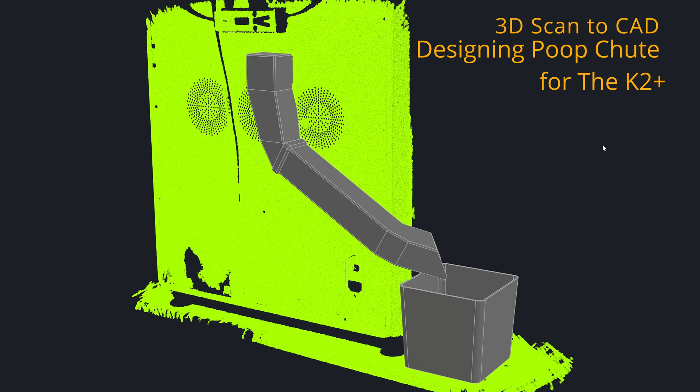Hi everyone, so I got myself a new printer, a Creality K2 Plus, a $1900 3D printer, and it weighs about 50 kilograms. This printer will replace the K1 Max that I've been using for over a year.

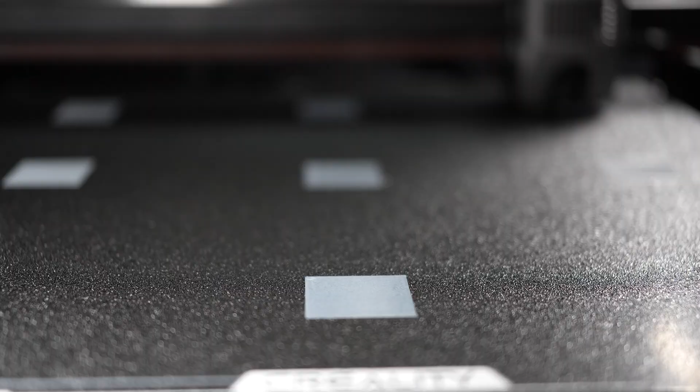Okay, look at the quality of the first layer, it's very good.

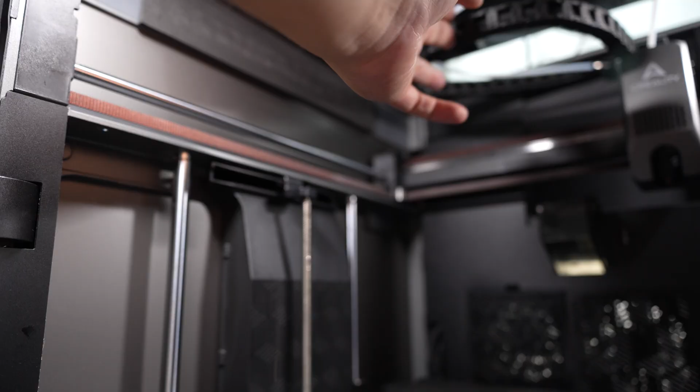So the only mod that I have made so far is adding a foam pad on the side of the printer, because the belt here is clashing and making a loud noise.

So if you look at the back side of the K2 Plus, there's a waste chute exit port here, but it doesn't come with a collector like a plastic bin. It will shoot out this little poop in the back of the machine against the wall.

So in this video, I'm going to make a chute rail from this point down to this point on the tabletop. There are two mounting screws here, but I'm not going to use them because they're self-tapping screws.

The female thread is plastic, so I don't want to take it off and put it back on. If you do this several times, it's going to strip the threads.

So I will use double-sided adhesive tape for mounting this.

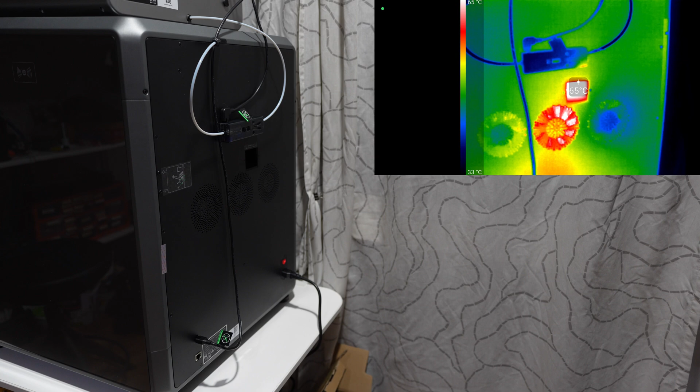So the temperature near the heating fan is about 53 degrees Celsius, and near the waste chute about 65, because now I'm printing with ABS. Now it's above 65 degrees.

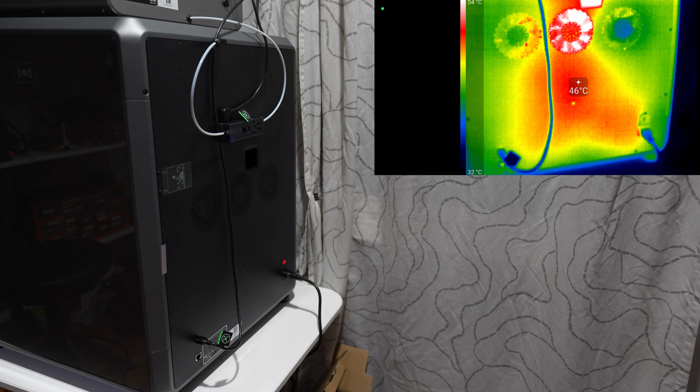So I recommend that you should use ABS or PETG. And this should be enough.

So the scanner that I'm going to use today is the Creality Raptor X for scanning. Creality K2 Plus, a flagship printer, is going to be scanned by a flagship scanner. And I'll use my gaming laptop here.

I choose 0.3 for the resolution.

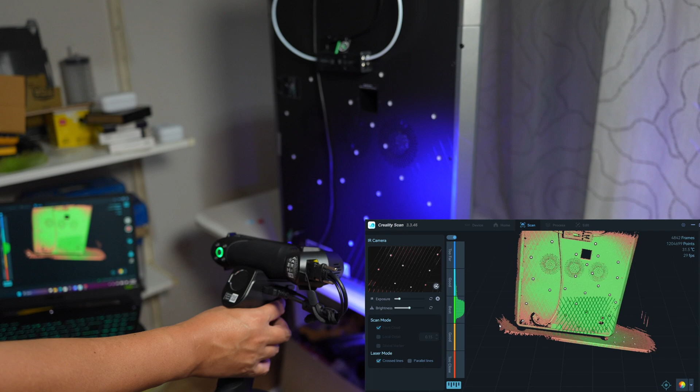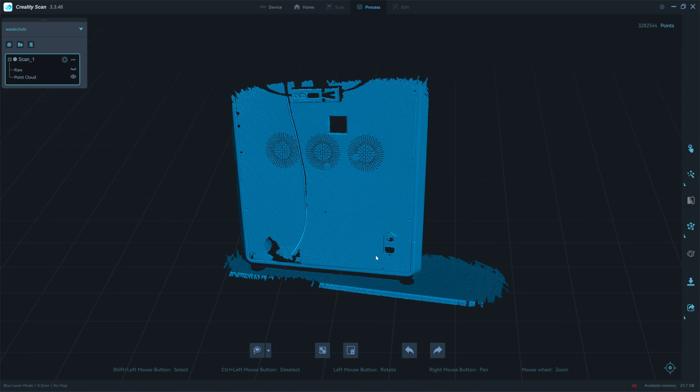Let's fuse the point cloud, 0.3mm. Remove the marker, click here. Okay, here's the scanning result from the Raptor X. Next, I'm going to export this as a point cloud.

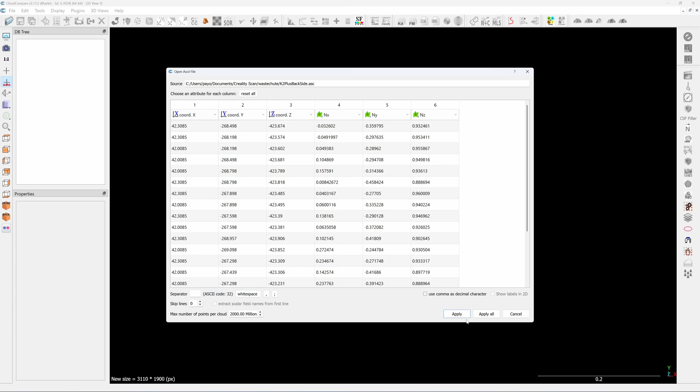Okay, this is CloudCompare. I'm going to bring in the point cloud for alignment. I will align this panel to the XY plane. I click on 3 points, 1, 2, and 3, because it's a flat plane.

Next, I'm going to align it to the X or Y axis. I'll rotate it using the edge of my monitor to align it. So now it's aligned to the X axis.

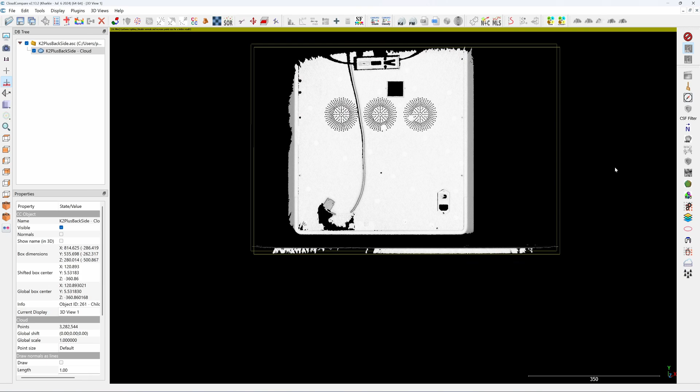Next, I'm going to move the corner to the origin point. Now it's already at the origin point. Next, I'm going to change the color. This is very important because in Autodesk Inventor, you can't change the color later.

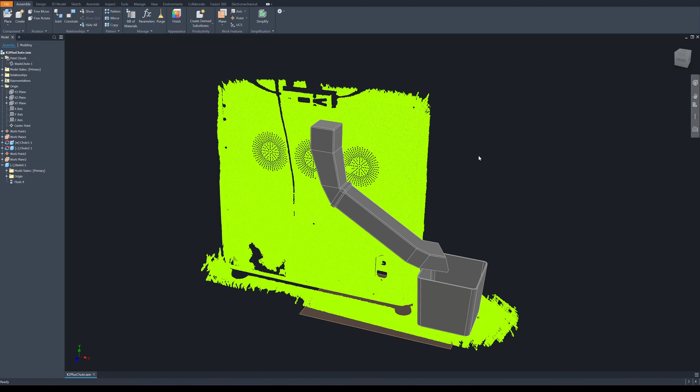Alright, now it's ready for reversing with Autodesk Inventor. Okay, here's Autodesk Inventor. This is the waste chute that I designed using the point cloud as a reference.

So my concept is that the tube has to be larger than the exit from the printer. The exit from the printer is 4 by 4 centimeters. So if I measure from this side to this side, it's about 42 millimeters.

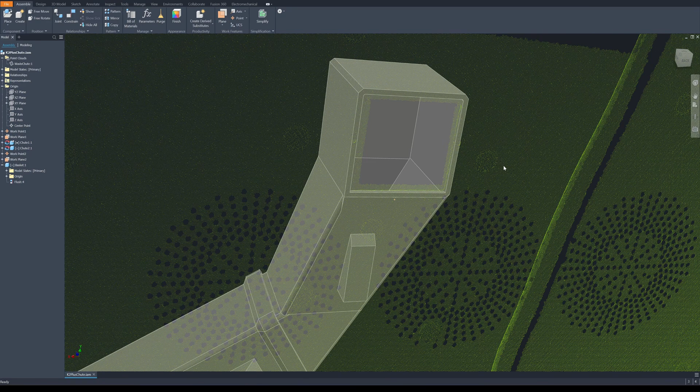The one that I made is larger, so the poop that comes out from the printer should be less than 4 centimeters. That's why the manufacturer designed the exit to be 4 centimeters.

And for the second part, I won't be using the panel screw because it is a self-tapping screw, so it's not meant to be used for mounting the waste chute.

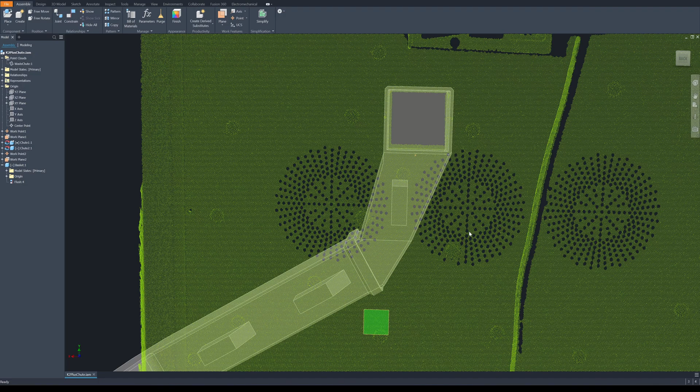The waste chute is between the two fans. On the left is the exhaust fan, and in the middle is the inlet fan for the heater. So I'll try not to block these two fans.

So I spaced the tip from the panel for 15 millimeters. I found that for a mechanical fan this size, if you have space about 15 millimeters, it won't block or give resistance to the airflow.

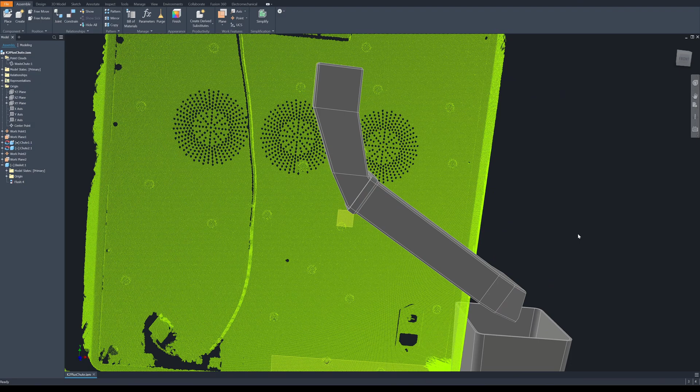This will be the mounting point, 3 points in total. So I divide the tube into 2 parts, because it's too long to print in just one single print.

The smaller one, the first one, has only 1 mounting point. So these two tubes overlap, one is bigger than the other, just a little bit, overlap about 8 millimeters. And this tube will go around the corner of the printer.

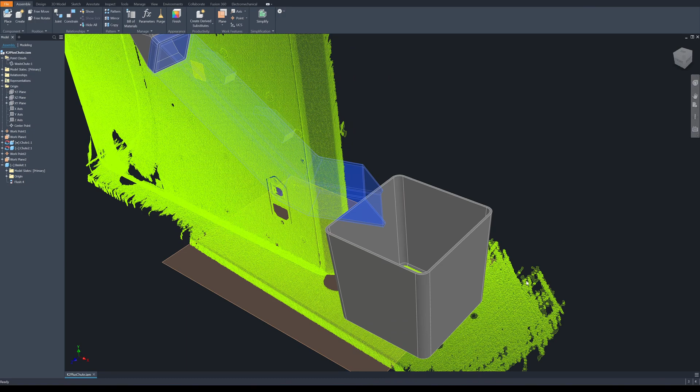Waste should be falling into this cup basket. The angle here is 60 degrees. If I put it to 45, the basket would be much shorter. So I think 60 would be enough for making the waste fall into the basket.

Okay, here's my workflow for designing this part. First step, I will create a sketch. I intend that the wall thickness of the tube will be 2.4 millimeters.

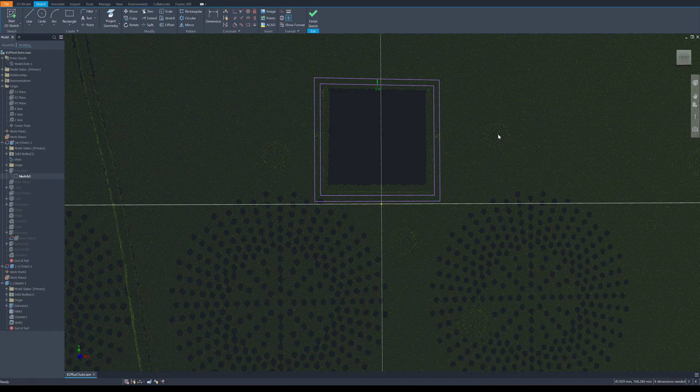Printing with ABS, I think 2.4 would be quite enough, not too thin, not too thick, a little bit larger than the exit hole from the printer. And I create this sketch by snapping it onto the plane, using the point cloud as a reference, the back panel plane. Here's the plane.

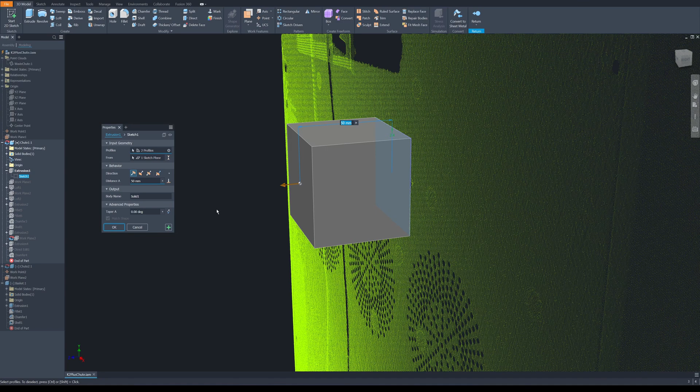And then I extrude it like a box for 5 centimeters, because I noticed that when the printer ejects the waste, it will fly out in the horizontal direction. So I need some space so that the waste won't knock on the wall and bounce back inside the printer. So 5 centimeters would be enough, I think.

Okay, next step, I create a plane here, horizontal to the table.

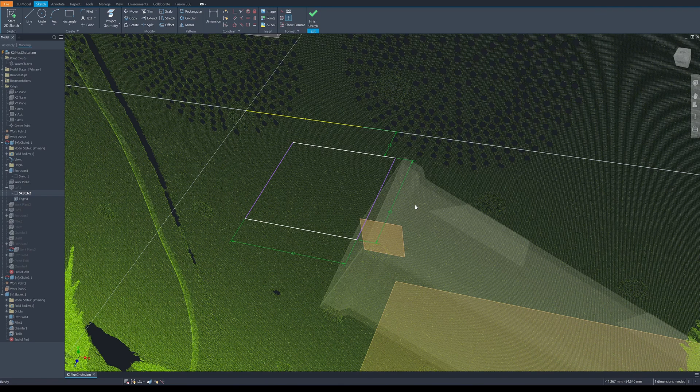This plane is perpendicular to the panel as well. The size of the square box here is 43 by 43, so I choose the minimum size for the tube at 4 centimeters. The largest poop will be able to pass through this channel, and I arrange it manually so it will be positioned a little bit to the right and 15 millimeters from the panel. Next I choose the loft command to loft these two faces together.

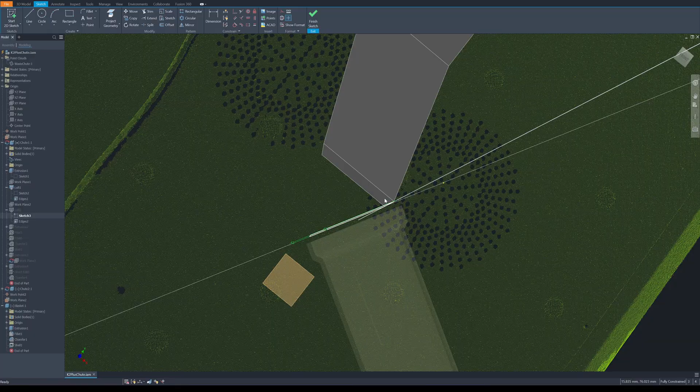Then I create a second sketch, making an angle to the first sketch of 60 degrees, so I can always come back and adjust this angle. First time I chose 45, but if I choose 45 the tube will be too low and closer to the table. So I think 60 would be enough, and the waste should fall into the box easily.

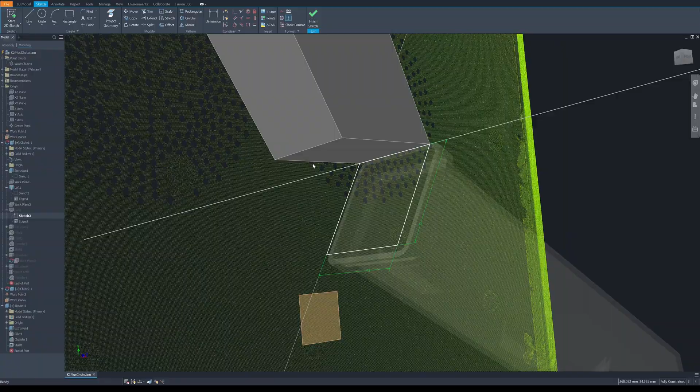I create a sketch with the same size as the box, and then I loft it for the second time, so it looks like a pyramid shape. Next I create a sketch here and extrude it for 10 millimeters, so we have this shape now.

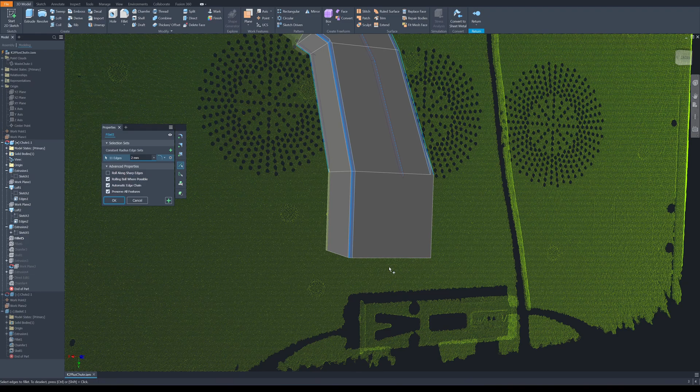Next step, I'm going to create a fillet on the 4 corners because we are going to print in this direction. This side will be facing the print bed, and this side will go up, so the wall line will run along this, and you should create a fillet so the print head will move smoothly without a sharp corner. Fillet is quite good when used parallel to the wall, as it can improve printing speed.

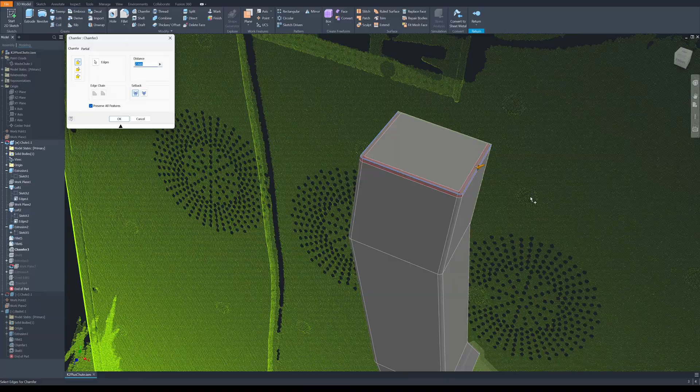Next I make a chamfer here for 2 millimeters, so it won't be too sharp. Next command, I use the shell command to make it hollow, and I remove this face and this face, so two faces removed. Now we have a hollow tube shaped like this, the one I just made.

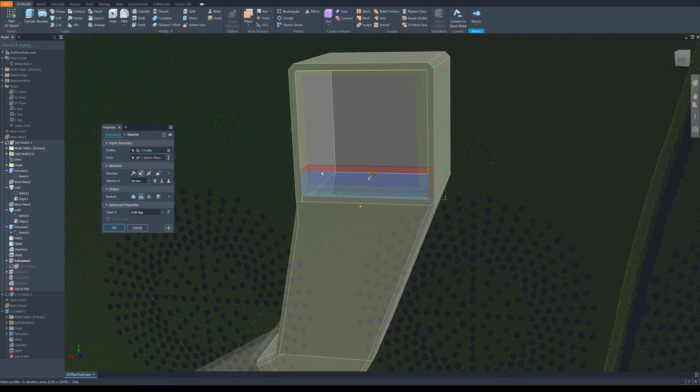And I made one cut here, because due to the thickness function the wall is aligned in one angle, so I need to cut it open. It's lower here, see, this one will be lower than the exit from the printer, so there's nothing blocking the waste from going back inside the printer.

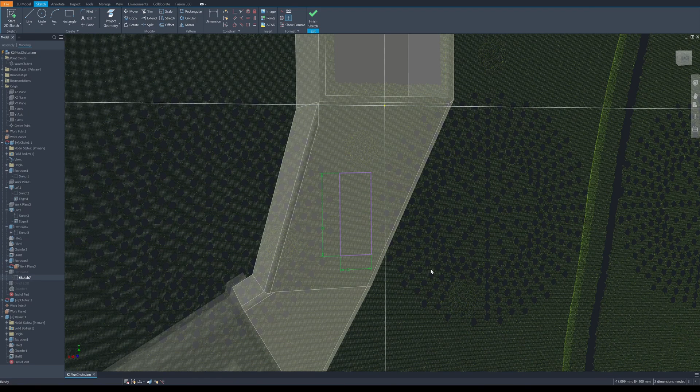Next I'm going to create a mounting point here for the first tube. The mounting point will be between these two fans, and the size is 12. 12 is the width of 3M VHB tape, and the length is 3 centimeters.

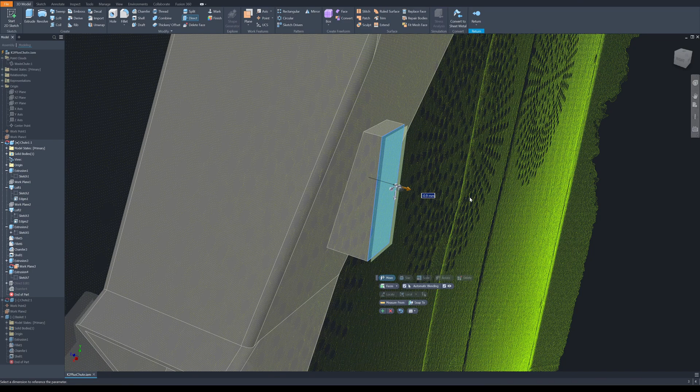Then I extrude it to this face of the part, creating a wedge shape, and then I offset for the thickness. I use the direct move function to move the face back about 1 millimeter to compensate for the thickness of the double-sided tape. So you need to use double-sided tape that is thicker than 1 millimeter, about 1.2. If it's thinner than this, this face will crash with the panel before the adhesive tape, so keep that in mind.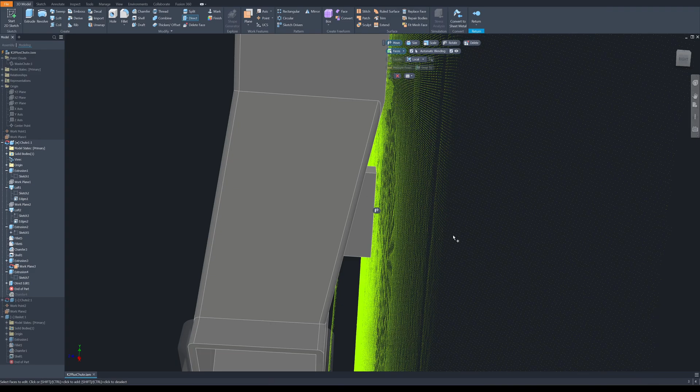3M VHB, the white color tape, that one can fit into this. I'm not sure about the red one. Okay, so we finished the first part. I'm going to the second part.

To create the second part, I project the profiles from the first part, and this yellow outer line is from the first part. Then I extrude it for 190 millimeters, so it's just passing the body of the printer, if you look from the top, see here.

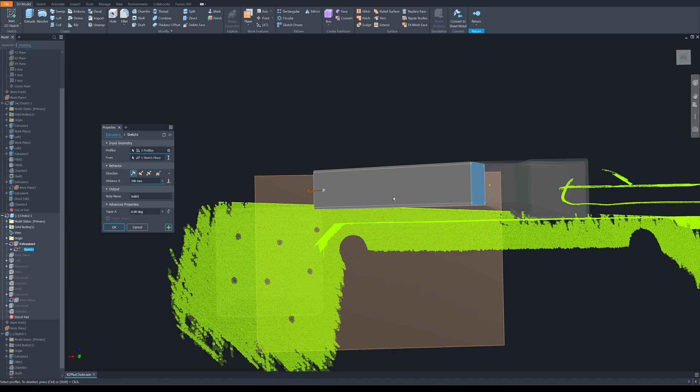And then I do the same, I make a turning angle. I think it's 45 or 60 degrees, I can't remember, let me check. Yeah, it's 45 degrees. I create a plane 45 degrees from this plane, then create this sketch which has the same profiles, and loft it to make a turning angle.

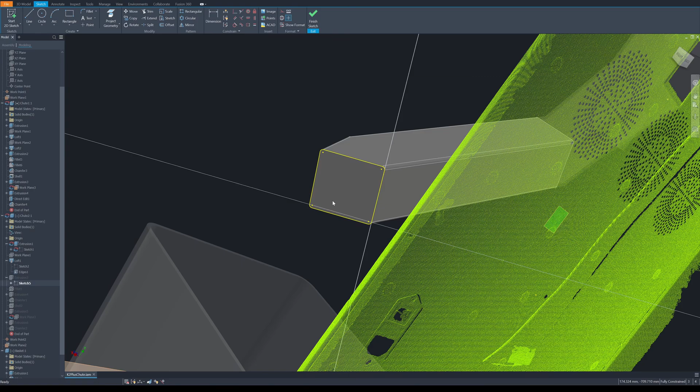Then I create this sketch, just projected from the last profiles, and extrude it for 8 centimeters, so it's now reaching the basket. I draw the basket, the last object. I draw the tube first and then the basket later, so I can find the height of the basket.

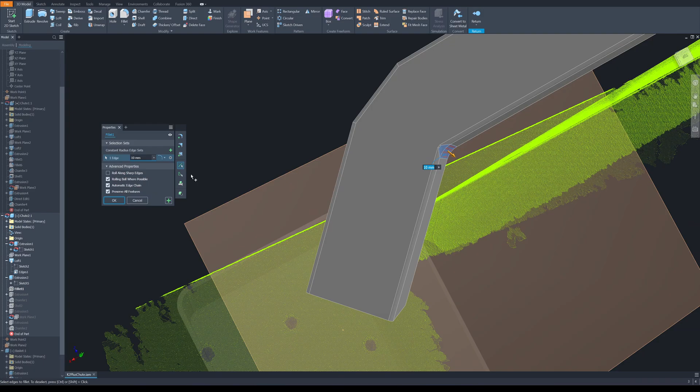Next I create a fillet here to make the turning smoother, so when waste falls and hits a curve or something, it's not a sharp corner. Next I create a new sketch on the starting point, larger than the original one by 3 millimeters, and extrude it for 8 millimeters, so we have a two-step body.

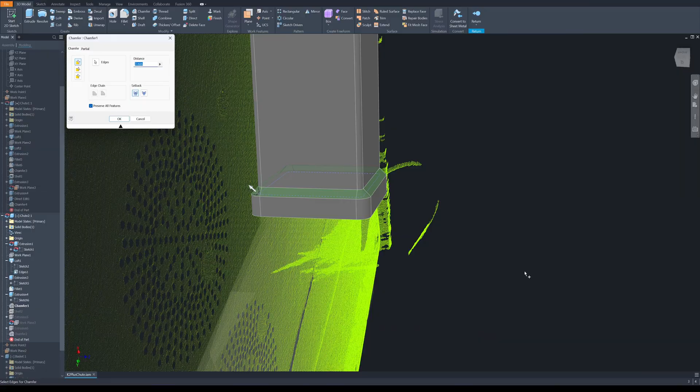This one is larger to create a flange, so we have a flange for mounting onto the first tube. I create a chamfer, so when I print in this direction it will go up smoothly. Next I create a shell, same command, using 2.4 as thickness, so this solid block will turn into a hollow tube with a 2.4 millimeter thick wall.

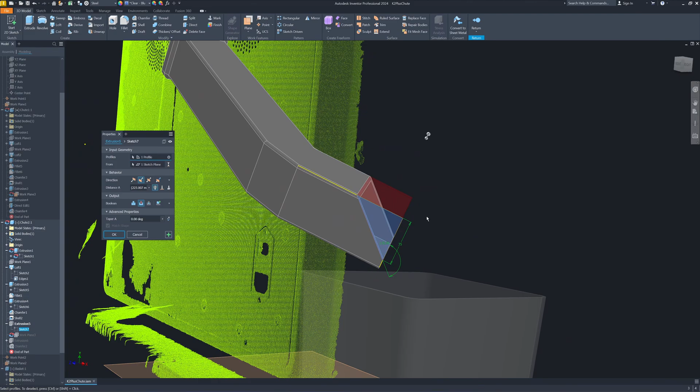So I create a sketch here for cutting these profiles. Here I cut it so that at the end of the tube it will look smaller and less aggressive. Next step, I create a mounting point, the same as the first part, drawing two rectangles 12 by 30, and I find a space in the center of the tube, create it on the plane of the back cover lid, and then extrude it.

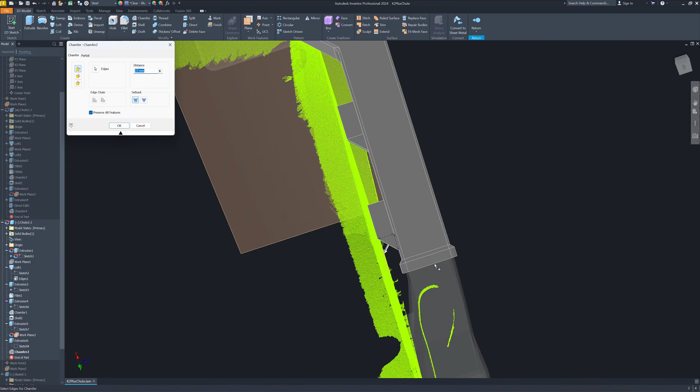And then I create a chamfer so that when I print in this direction, this chamfer will help, so I don't need to use a support for this. But if I don't have a chamfer applied here, I'm gonna need a support, which is a waste of material. So if I use a chamfer here, the filament can climb up. Okay, it's all done for the tube.

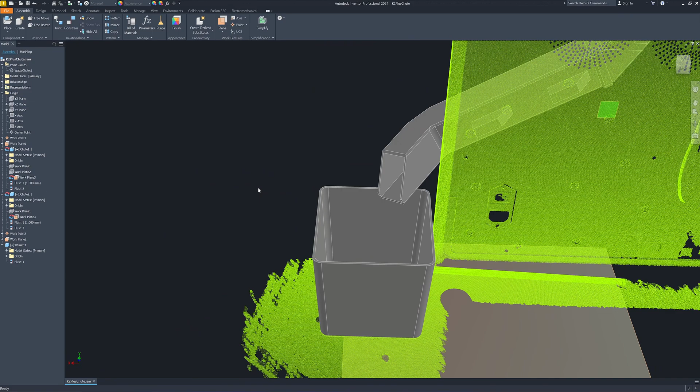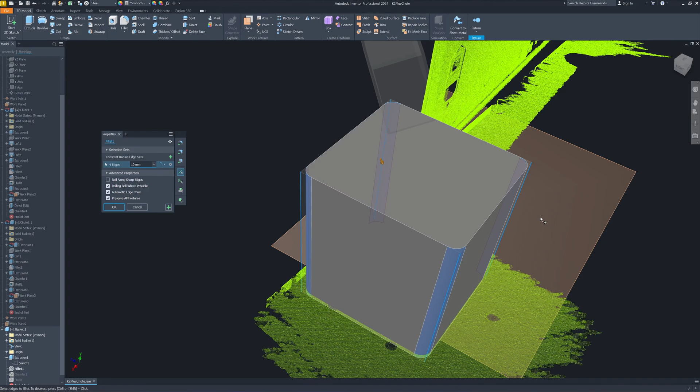And for the basket, you can simply use the cardboard from the filament cardboard box to put it here. But if you want to print the box with the same size, just a simple function that I use to make this part: draw a rectangle, then extrude it with an angle of 3 degrees so it looks tapered. And then I fillet the four corners to improve the printing speed, chamfer the bottom, and then shell it 2.4 millimeters, removing the top face.

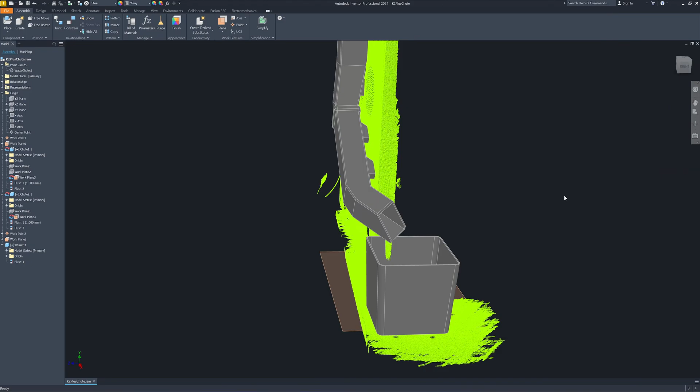And that's it, 3 parts to be printed. These 2 parts will be printed with ABS because I think it's going to be over 60 degrees on the back panel here. And for the basket, you can use PLA or PETG for printing. Alright, let's move to the printing part.

Okay, it's Creality Print. I dropped 2 files, part 1 and part 2. For part 1, I'm going to align this face to the print bed, and you should space this apart a bit because you're gonna need support on this part.

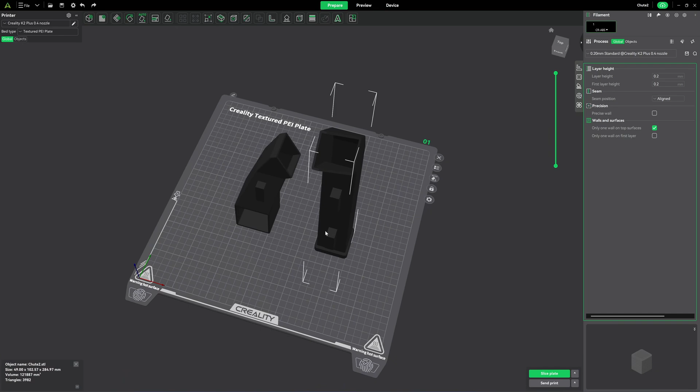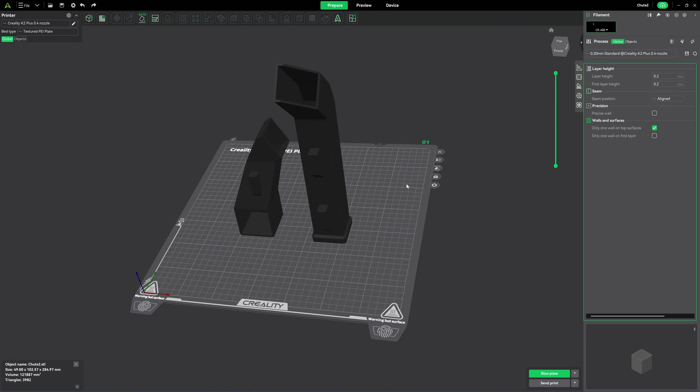Okay, space like this. The first time I sliced it, I put these 2 parts too close together, and the support was eaten into the object, so one part of the base here was cut off by the support. It's because it's placed too close together. Place it like this, so let's slice it.

Before that, enable support. I choose tree (auto). Okay, so this part, the longer one, does not require any support - see here, 0 support. But this part, unfortunately, requires support. I don't think it's difficult to remove though.

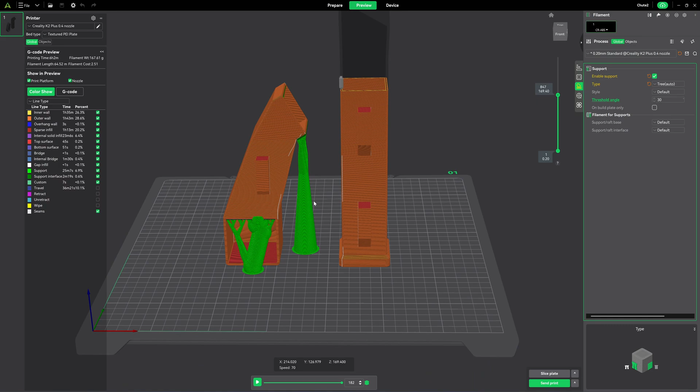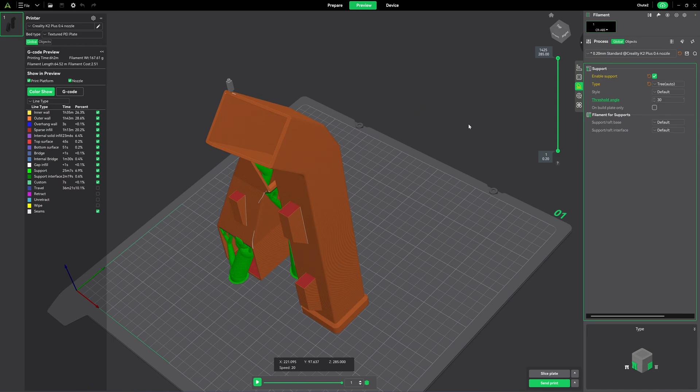You should space this from the object a few centimeters away, because when you print it, don't put it too close. So the printing time will be 6 hours and 167 grams of filament. I put the download link in the description so you can print this yourself, and also the point cloud in case you want to design your own poop chute for the K2 Plus. Alright, I send this to the printer to see how it fits and performs.

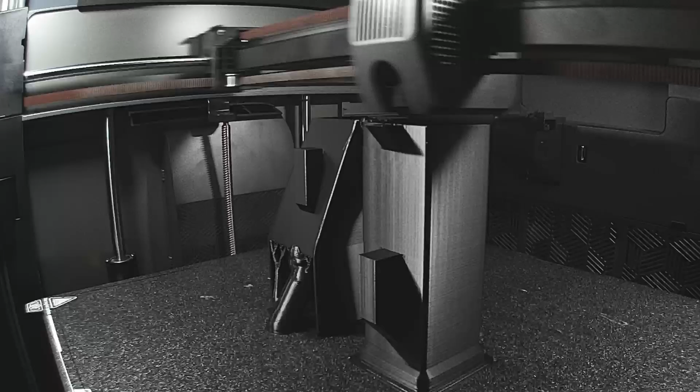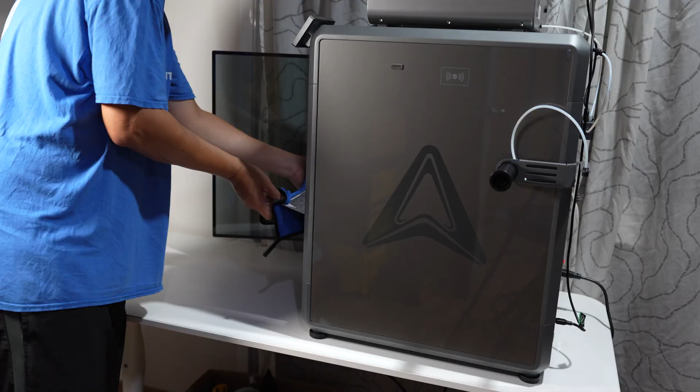Okay, the print has finished after about 5.5 hours. Let's remove it from the printer so it will cool faster. Okay, so it just comes off like that. I apply adhesive.

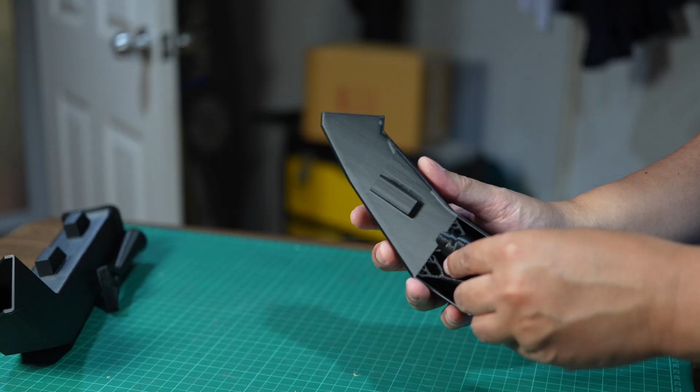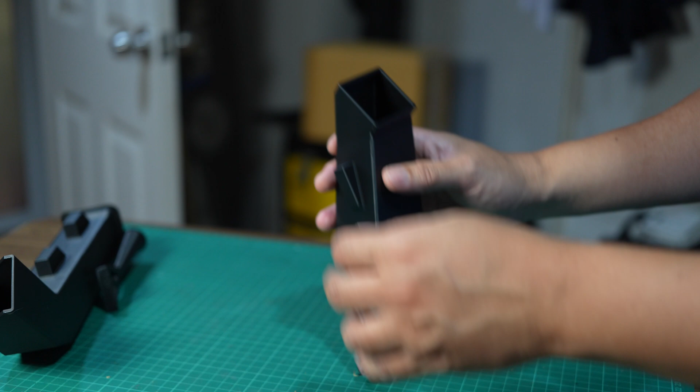Look at the quality of the print. I can see some wrinkling, but there is no Z banding. The surface quality is better than the K1 Max. This is a Z seam. I dried this filament with the Space Pi X4 for about 8 hours before I printed.

There's something wrong with the slicer - the support cut into the printing part. I didn't see that in the slicer. So you should space the 2 parts away from each other.

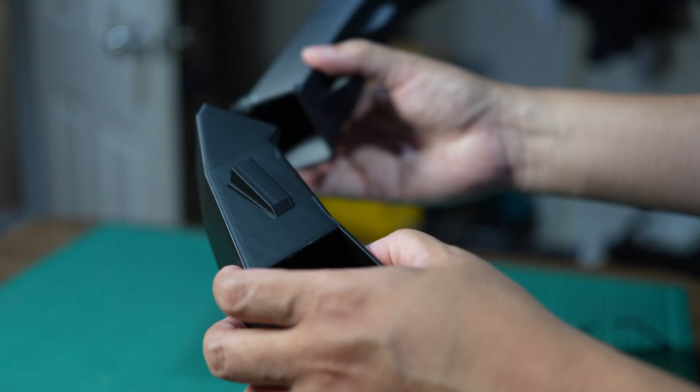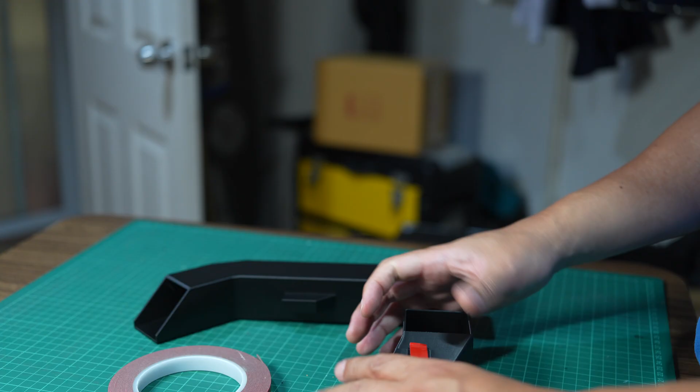So in assembly, it would be like this. So if I put some poop, it will come out. Yeah. Okay, so I think the poop will go out. Heat resistant.

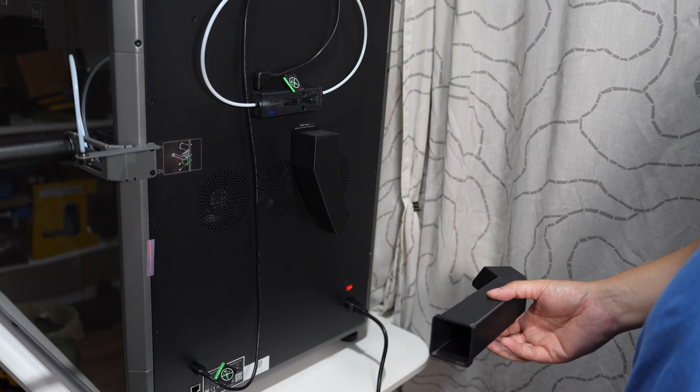You need to install the first tube first. There's a sticker here - this edge of the tube has to align just under the sticker. Okay, the first part is in, now the second part.

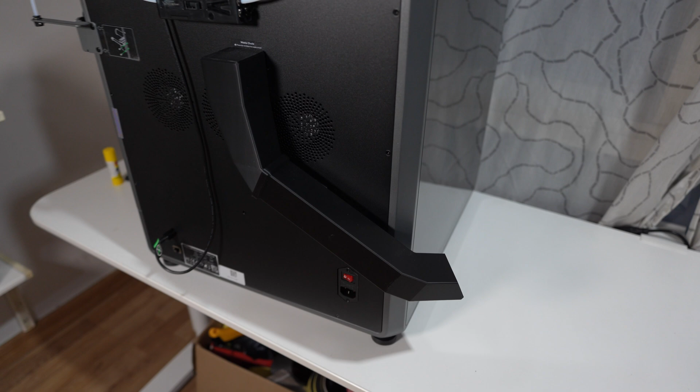And for the adhesive, I recommend that you use 3M VHB. It will have a thickness around 1.1 or 1.2 millimeters. If you use a thinner adhesive than this, it's not going to fit because this part will crash with the panel. It's quite sturdy - I don't think it will fall even with high temperature. Just remember to use VHB, 3M VHB.

Next, I'm going to print the basket, just a simple basket that I made. You can make it your own, but this time I will use PETG to see how well this printer will print with PETG. Bed temperature 60 to 80, and the nozzle is 220 to 260.

Okay, here's the printed basket with PETG, and it removed from the print bed very easily. When it cooled down, I just pulled it off. There is no need to use adhesive for PETG and the ABS for the K2 Plus printer.

So if you look at the quality of the print, I still can see the ringing, but the surface is smoother than if I print it with the K1 Max. And when I squeeze it, there's no cracking noise. Unlike ABS, sometimes when you print a thin wall and squeeze it, you're gonna hear cracking noise.

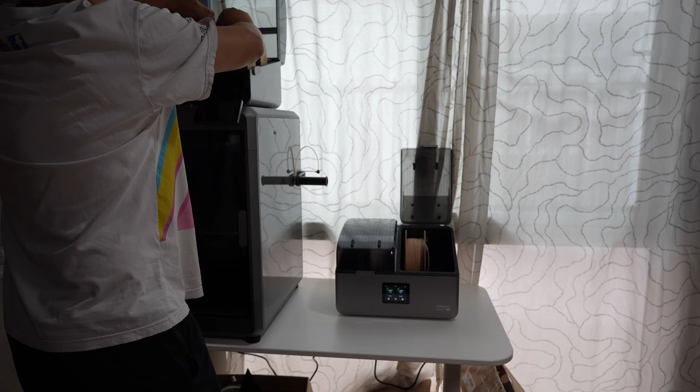Okay, so done. You need to keep it in a dryer, otherwise it's going to be stringing.